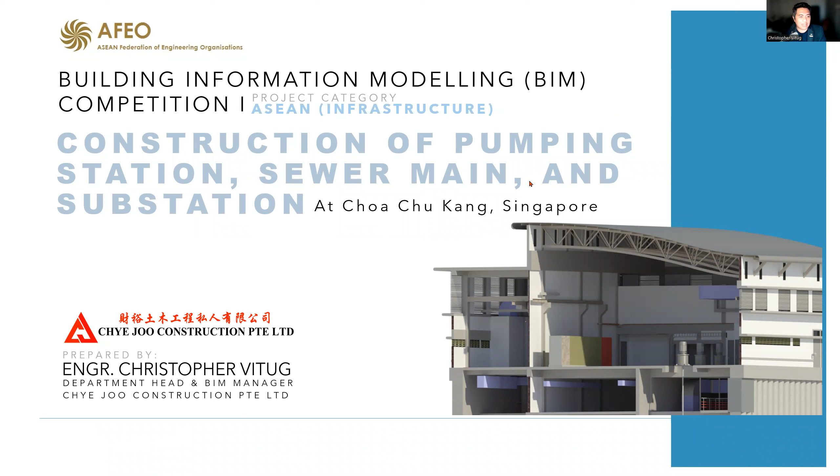Good morning, everyone. My name is Engineer Christopher Vitug, and this is my submission for the BIM competition for project category ASEAN infrastructure. The project that I'll be presenting is entitled Construction of Pumping Station, Sewer Main, and Substation at Choa Chu Kang, Singapore.

So the content of my presentation: there will be a short introduction of myself, the company, the project, the BIM usage, and lastly the BIM productivity assessment and the benefits.

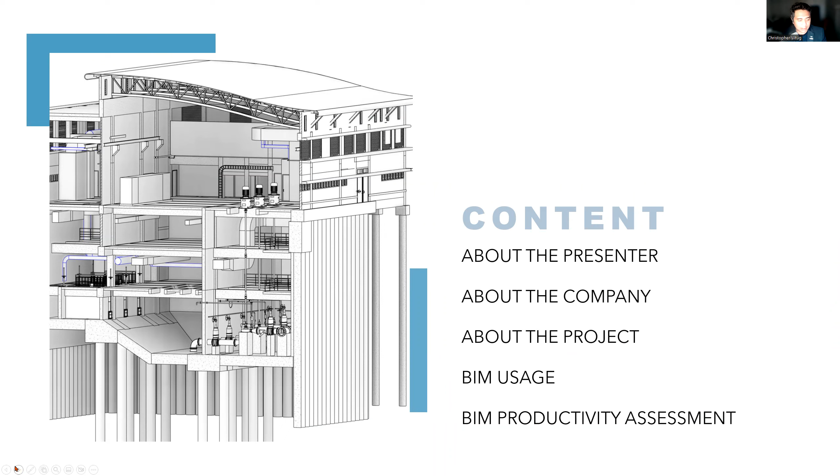A little bit of narration about myself. Currently, I'm on 21 years practicing civil engineering, both here in Singapore, the Philippines, and in the Middle East. I've been practicing BIM for about 10 years now, which includes 6 years involving virtual design and construction. Graduated at Angeles University Foundation in the Philippines. Studied and completed my specialist diploma in BIM here in Singapore in 2012.

Then I went to the US, Stanford University, to complete my virtual design and construction advanced management program. At the moment, I am currently taking up my master's degree in construction engineering and management. It's an online course in Mapua University in the Philippines, and I'm also doing my specialist diploma in computational BIM.

I'm also affiliated with the Singapore Institute of Building Limited here in Singapore, American Society of Civil Engineers, Japan Society of Civil Engineers, Institute of Engineers Singapore, and other institutes affiliated to ASCE and the Philippine Institute of Civil Engineers. I'm also a registered ASEAN engineer. I think I was conferred in 2016, if I'm not mistaken, 2016 or 2017. But I believe it was during the time in Palawan.

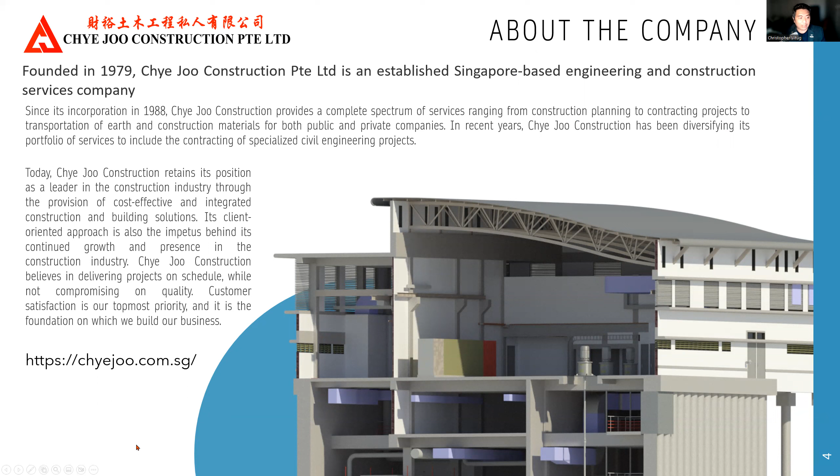So about the project. Because of the time constraint, I didn't manage to get approval in time for other projects which we recently completed. So I decided to submit an older project, which is this one. But anyway, I hope this is adequate enough for the competition. This is also a very good project, a very good example of the usage of BIM from a contractor's perspective. By the way, I will not be discussing the cost benefits because it's a little bit sensitive, and I didn't get the approval for discussing the cost part. I'm sorry for that.

So this project was actually completed in 2014 or 2013, if I'm not wrong. During that time, BIM was just starting here in Singapore, and it was not really mandated yet for submission and on project level. So my company decided to implement BIM early without the government requiring it. This structure is a pumping station, comprising architectural, structural, and a lot of MEP. Roughly, the gross floor area is about 3,330 square meters. It's very heavy in mechanical elements.

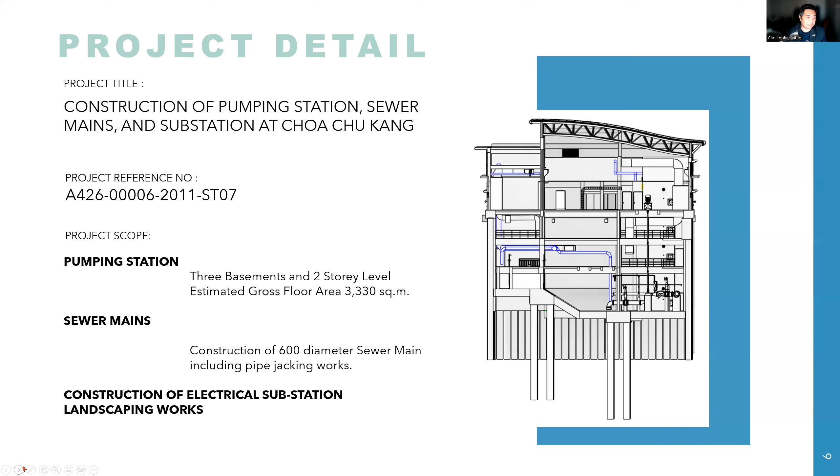So the BIM uses are based on the objectives, on what the project team wanted to achieve on the project. Basically, the selection of software and the implementation of BIM are based on how, as a contractor, we can deliver this project effectively and on time. So these are the objectives. One of the objectives is to create an intelligent model that can extract quantities and visualize the design intent, because most of the time engineers have a hard time understanding the project just based on a 2D drawing.

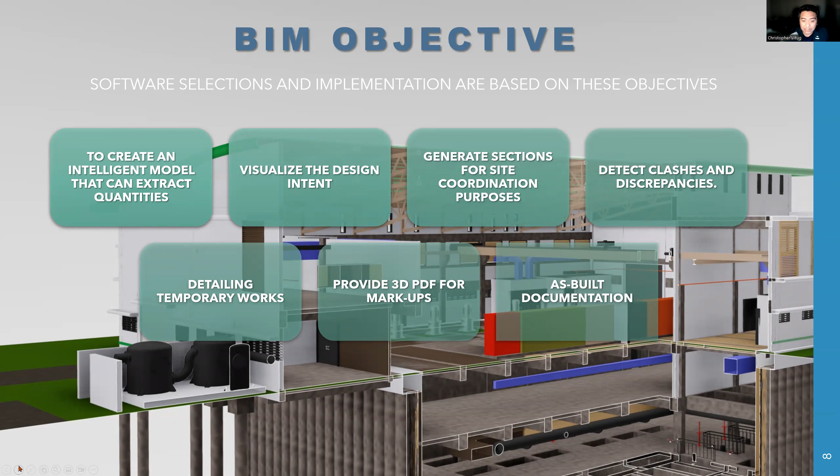Our objective also is to come up with adequate sections within that structure, so that our engineers and the site people can understand, and which can be used to coordinate with other subcontractors and foremen supervising the project, detect clashes and discrepancies in the design, detailing of temporary works including the design, provide 3D PDFs for markups, and as-built documentation.

So based on all of these objectives, we decided to use these four main software. For the 3D authoring tool, we use Revit for modeling the architectural, structural, and MEP elements. We also use Revit for extracting quantities, 2D drawings, and producing visualization materials. For clash detection and simulation, we use Navisworks Manage. For earthworks, we use Civil 3D. For PDFs, we use Bluebeam Revu.

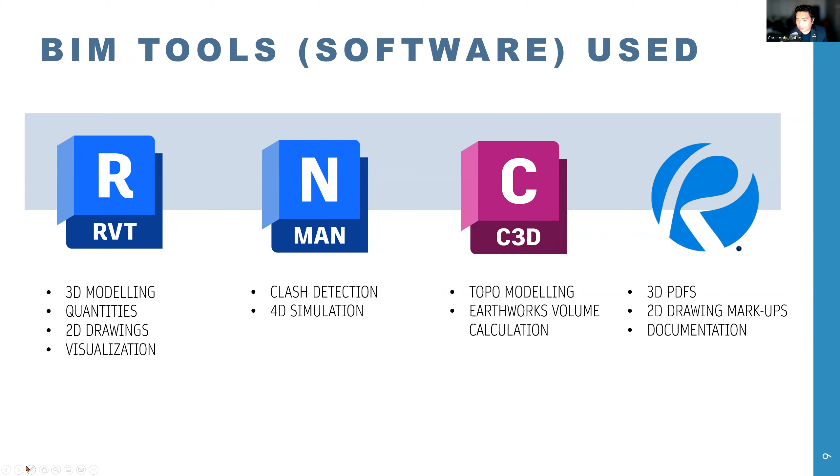So in generating the 3D models, actually what we implemented is not a single model BIM. We actually have multiple BIMs and then we just federate them.

One reason why we did that is because during that time, and it's also the same practice today, models contain a lot of information and we don't want to overstress or choke the capacity of your hardware. So as a good practice in BIM, you have to try to separate or federate the models into different disciplines, sometimes levels or areas.

Okay, but Revit is quite good in streamlining this coordination and collaboration, even if it involves multiple teams. There is a function in Revit that allows the other user to be notified when there are some changes being made on other disciplines. So I think that's the other advantage we find very useful in this process, the notification part.

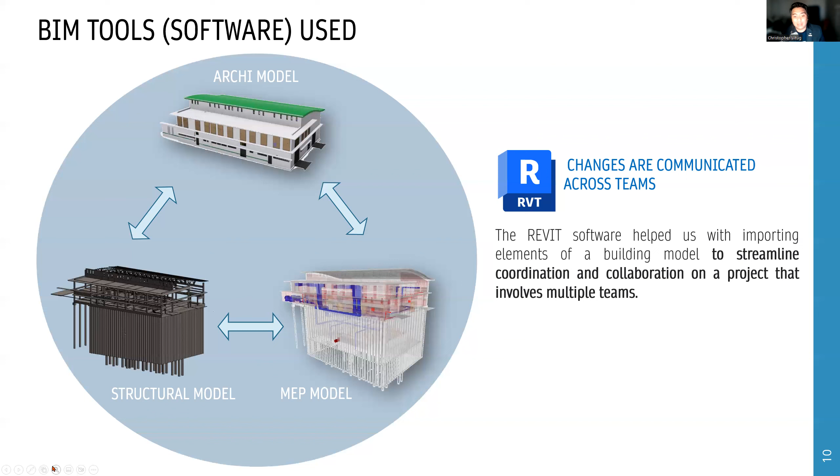Before, if you're working in a silo environment, sometimes the architect makes some changes, and you will be informed of the changes not that fast. So you cannot react properly. There's a latency in the reaction to those changes. So using this kind of tool helps us streamline coordination and collaboration.

We also use the BIM models in Revit to extract quantities. These quantities are being used during progress claims and the final account. Some other quantities are being used in purchasing, especially concrete. Yeah, which is very useful.

One more thing about quantity takeoff, it took away the burden for the QS. We believe the most stressful part of the QS's job is to quantify all these quantities, and instead of focusing mostly on the rates and sourcing out quotations, most of their time is spent on quantity takeoff. So when you take out the thing that struggles them, it makes them more efficient in pricing all these quantities.

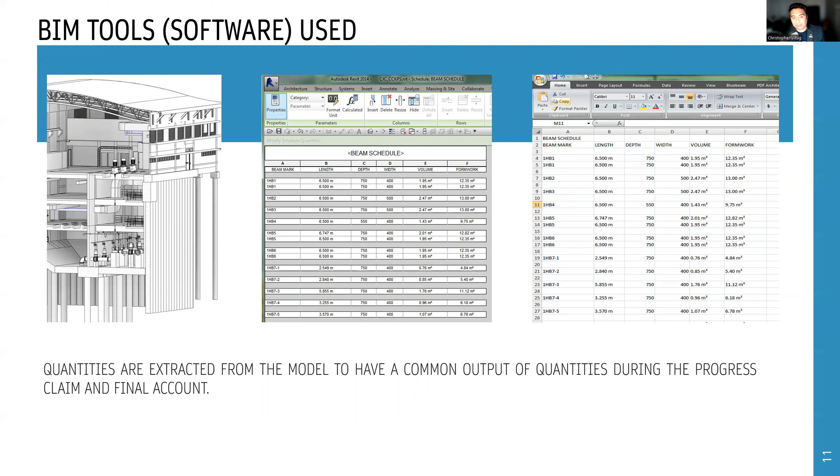So these tools help our site teams, project managers and planners properly understand the nature of the existing topography and how they will spread out the cut throughout the site, and minimize disposing and importing of materials. And we also use all these to quantify our volumes. The software can easily provide a table so they can verify all the quantities. Even if your client doesn't know how to use the software, we provide sections extracted from the 3D model.

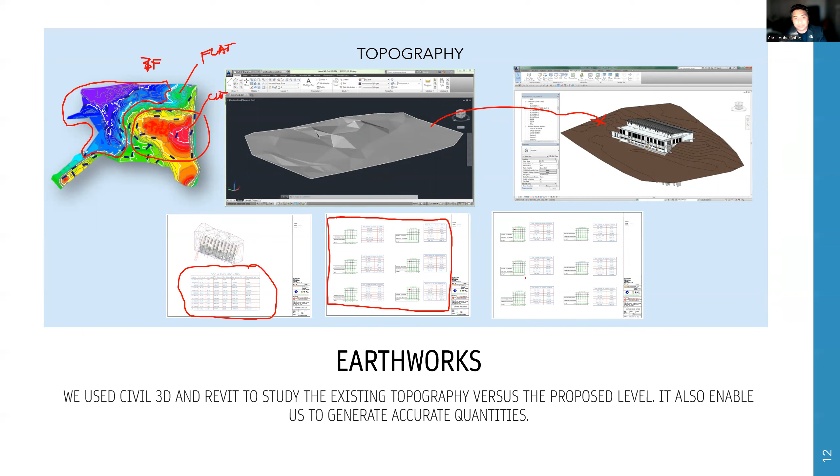It actually helps the client to approve our method statements, and at the same time, it guides our site engineers and foremen during the actual execution. So we are doing the planning virtually first, and if everything is okay and safe, then we can implement it on the site.

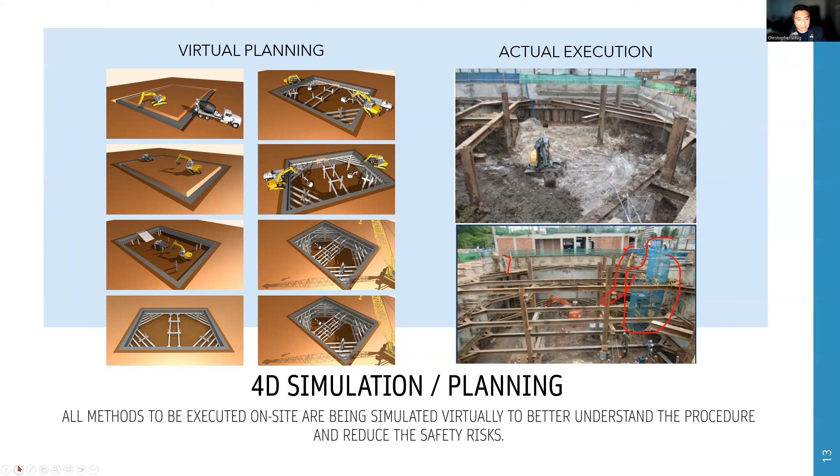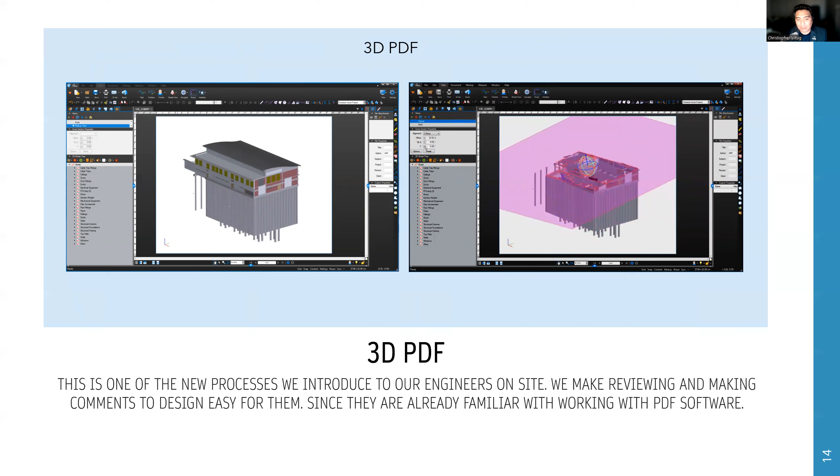And also it minimizes our waste, especially in the materials or temporary works. If you can see here, because some of our engineers are not really tech savvy guys, we use Bluebeam PDFs to view our 3D models. So our engineers are using that software to review this 3D and make their comments. You can see here there's a video showing how easily they can do markups and identify all those clashes as well.

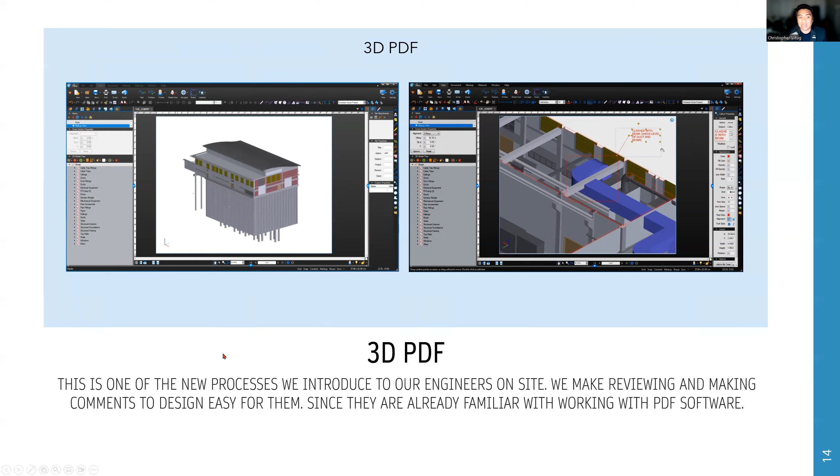And we also avoid printing on paper as much as possible, especially since we all know that most of the papers that we use are not that cheap. Most of the time we use A3 as the smallest size of paper for viewing drawings. We also have A1s and A0s.

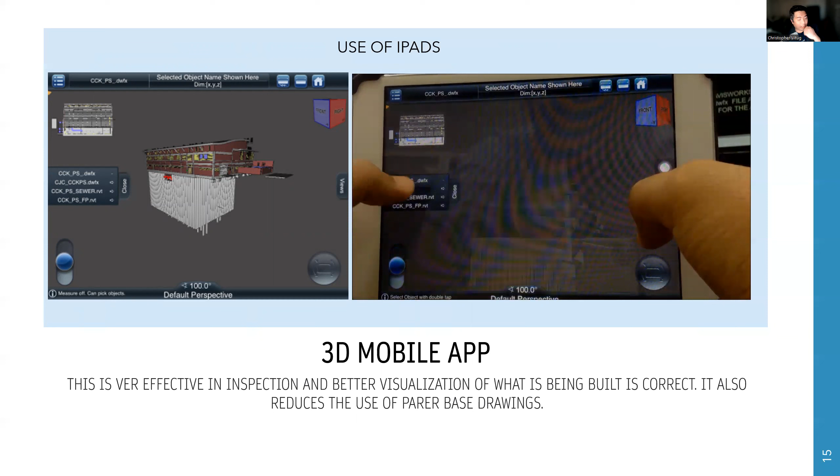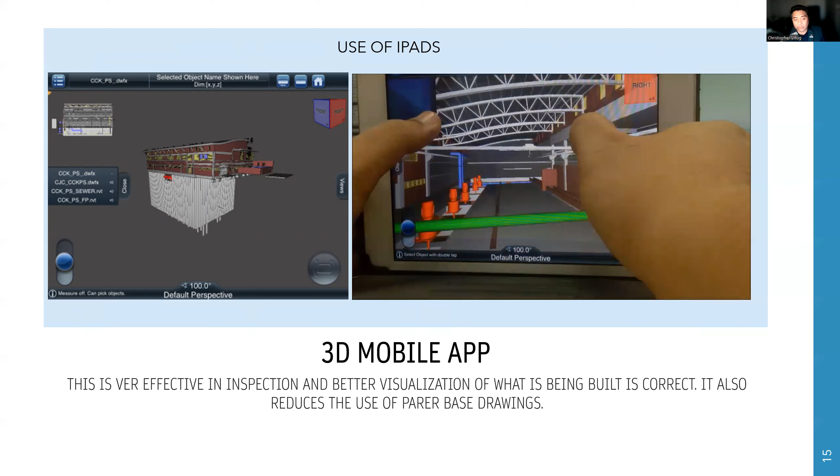We also use a 3D mobile app. During that time, we were using BIM Anywhere, but nowadays, bringing the model on site is very accessible, and a lot of software is available on the market. If you're subscribed to Autodesk 360 or Docs, then you can actually view them through your mobiles. But during that time, we were using BIM Anywhere.

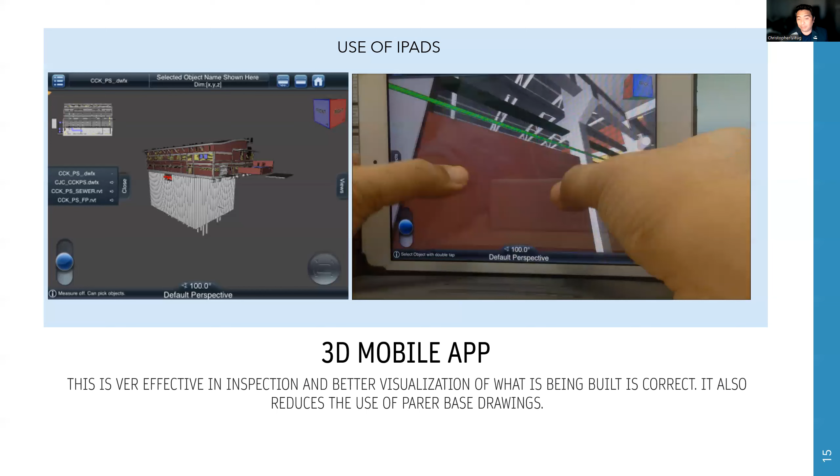As you can see here, it's quite easy to use. Instead of bringing a bulk of drawings to the site, they can just use a small iPad or a bigger screen iPad on the site, and they can verify all the structures being constructed are really in accordance with the drawings and the models. Actually, in this application, you can filter out all the elements. If you wanted to see only the mechanical components, or a particular component, you can filter them out for easy viewing.

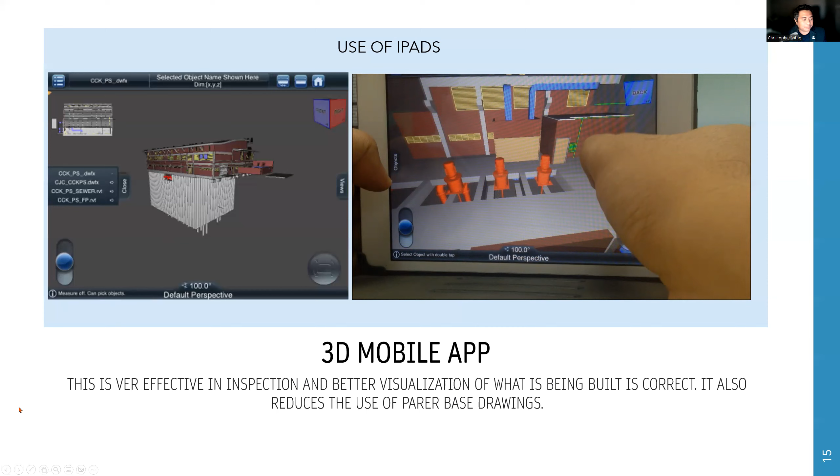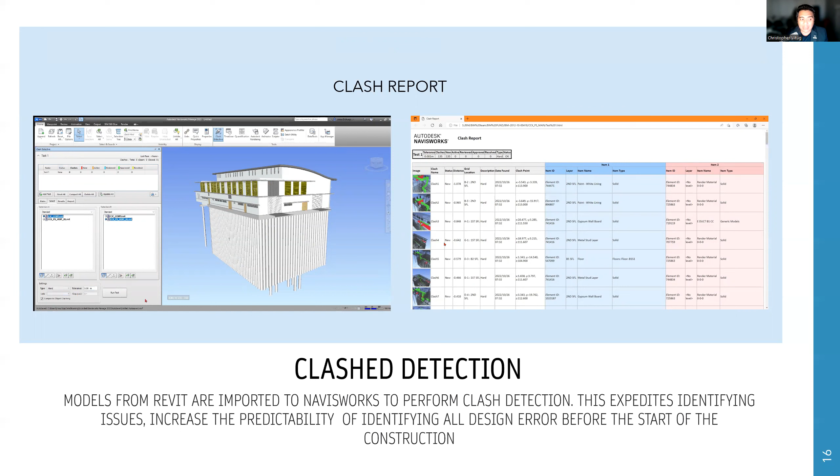We also do clash detection. We import the 3D model from Revit to Navisworks and perform clash detection. This expedites identifying all the issues and increases the predictability before we move into the site. One of the things we changed in our process is we spend more time studying in the pre-construction stage. We really spend time studying the drawings, using all the models and drawings issued to us with all this technology, and try to resolve them as early as possible before we move into the site to minimize the waste.

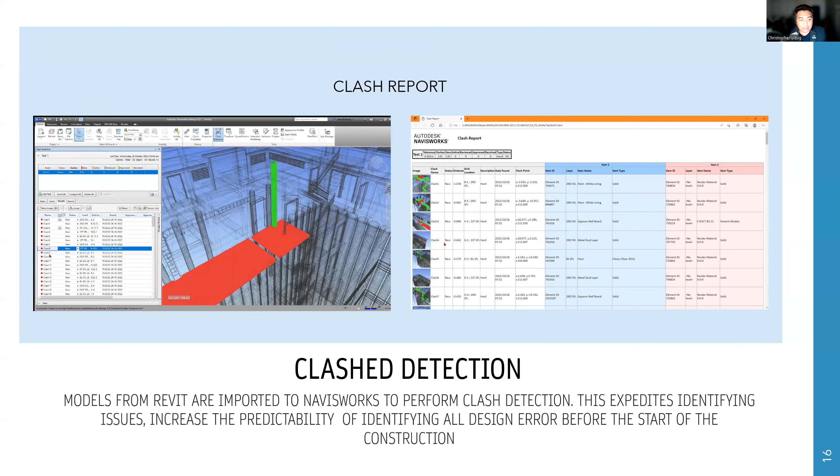So by using all this technology, it allows us to almost predict or identify all the issues in the design and be able to rectify or redesign them before we even start the projects. So the client is also very happy that it also minimizes the variation works. The impact of clash detection minimizes the cost.

Let's say you only identified those clashes when the thing is already constructed, say a wall is already constructed and suddenly you find out that your ducts are punching through a beam or wall, then it will cause a lot of variation. It can imply additional cost for demolition, those kinds of things. The report can be exported into HTML or an Excel file for proper recording as well.

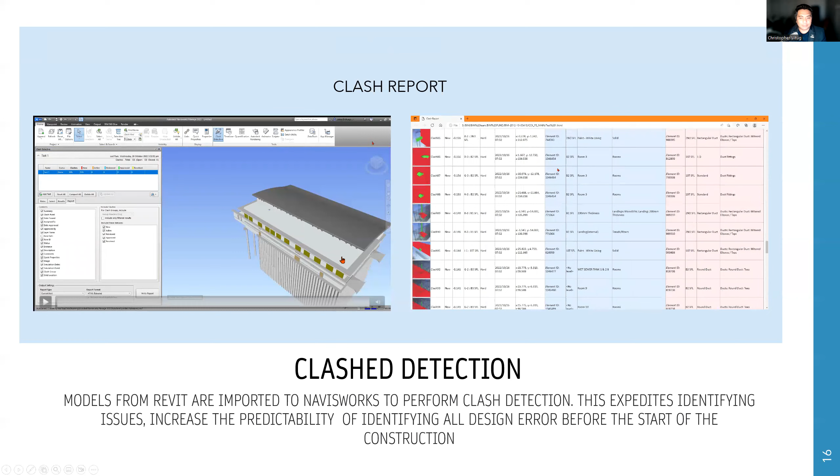So we also use Revit to produce all the drawings, all the sections into as built. Basically, one good thing about a BIM process: we all know that the traditional process of doing the as built is always at the end of the project. But in Revit, we are editing or modifying the models once the information comes to us in the form of a survey or a report from our engineers on site. We automatically update the models, and that model will be as good as the as built already.

So every progress, let's say every week or every month, once we update that model, it's always as good as built already. So by the end of the project, we don't actually spend more time correcting the model. So most of the time now, we just extract it or change the title block from for construction to as built. That's the only thing that we are changing.

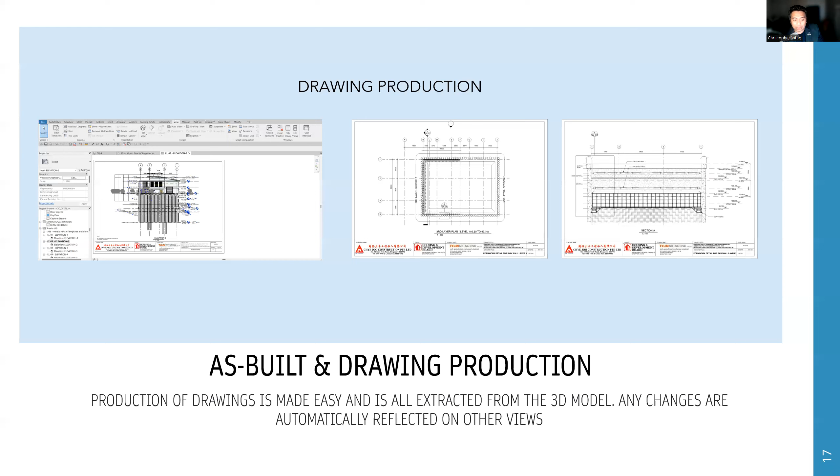But even that change from for construction to as built is quite easy as well because we already have a template for that. We just need to insert it into the model, and it will automatically change everything. So it's also very dynamic in nature.

So here are the BIM productivity assessments and benefits that we found in our BIM implementation. One of the benefits is really the increased predictability of design conflicts and discrepancies. It really is a game changer. It keeps our planning in construction very efficient. We do a lot better in collaboration. Actually, the BIM process really promotes collaboration.

If you try to implement BIM, it will really force you to collaborate with other disciplines to make this thing work. Better understanding of the design intent, reduced risk, accurate quantity takeoff. So most of the time, in our traditional process, before we implemented BIM, there was always this discrepancy between the QS of the client and our quantity takeoff from the contractor side.

So nowadays, before the start of the project, we lay down in black and white the terms or procedures, or what quantities we are going to use in finalizing the quantity. So in implementing BIM, the BEP is quite important, the BIM execution plan. Once all parties agree to use the BIM model as the source of information, everything becomes very easy, including settling the final accounts.

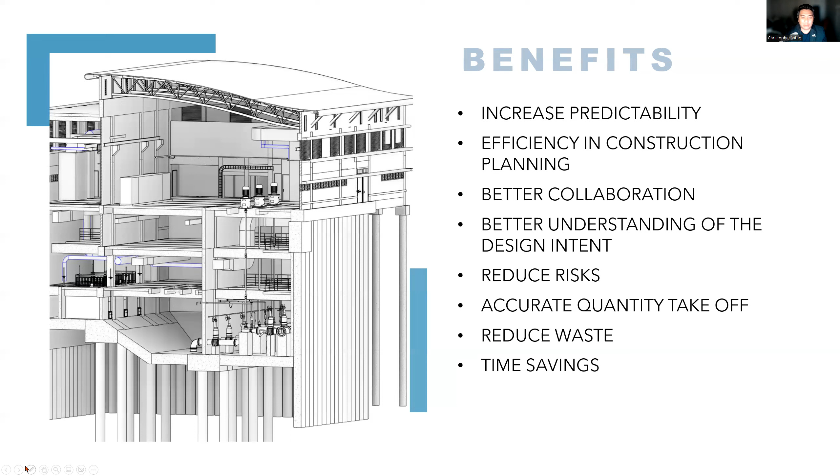It also reduces waste in time and cost, especially in purchasing materials. Generating the quantities from Revit and using the 4D simulation really helps us plan our sequence of works well. Thus, it minimizes double handling, excess material orders, those kinds of things. Of course, time savings.

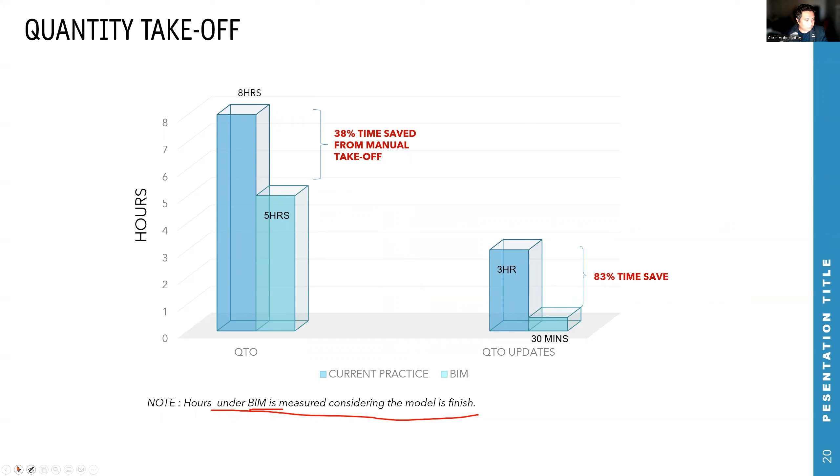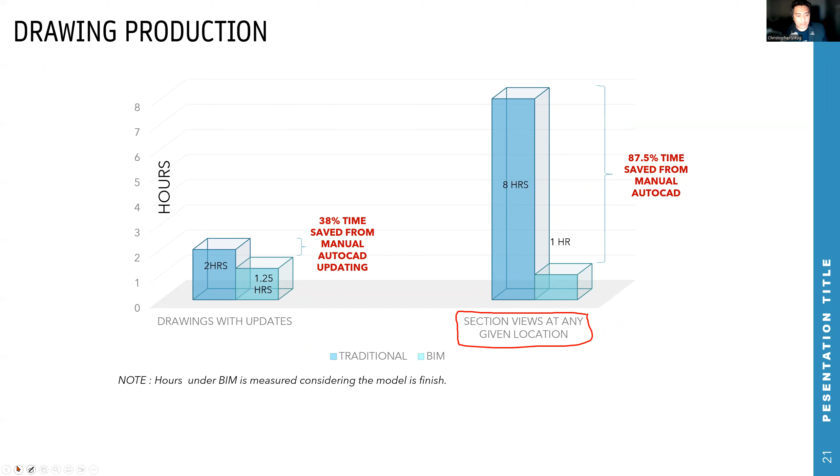In drawing production it is very useful as well, especially in generating sections. Most of the time, construction drawings give you very limited sections, especially if the building is quite complex. Sometimes a consultant will not provide adequate sections, but through the use of BIM, it really saves us time in producing all these detailed section drawings for quantity takeoffs for earthworks.

So I think the most painful part of earthworks is taking off quantities. We found that we have at least 2 days savings using our software now. But nowadays, even our surveying works, in our current practice, we replace with drones. Actually, drones are quite useful.

We convert the photogrammetry into 3D point clouds, and then import them into our Civil 3D software for volume calculation. Back in 2013, 2014, we still used manual surveying, but nevertheless we still managed to save some time using our software to generate the quantities.